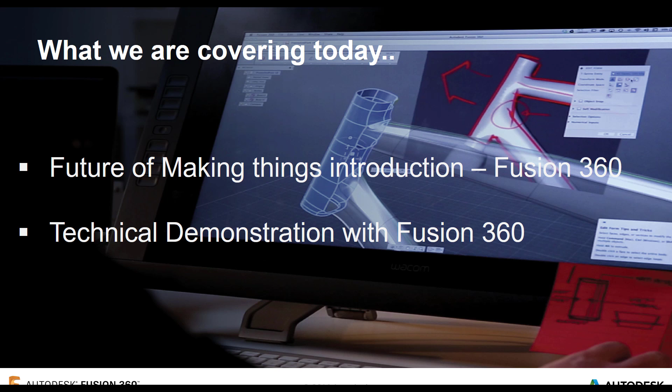So let's start off with an introduction to the Future of Making Things here at Autodesk. Generally speaking, to a lot of our customers, we see that they have quite a linear process. They start off with a concept design when generating a product - these could be just hand sketches, or very rough, rudimentary 3D models. They move into a design phase where they need to put some more production elements to the design, so more detailed design at that stage.

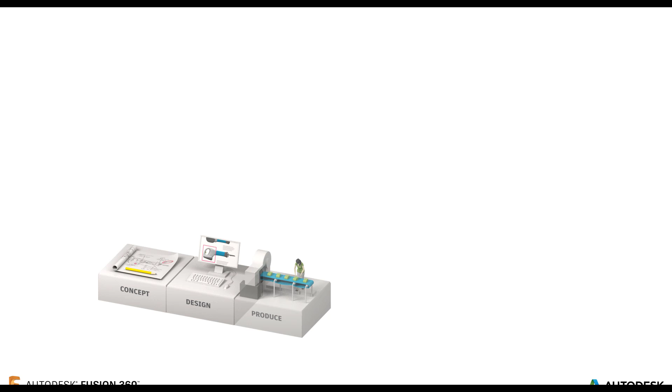Moving into the production phase, this is where they start to look at creating the products, whether additive or subtractive manufacture, or even assembly, into selling that product, and then finally into the operation and retire phase. Now, we term this a traditional product life cycle, and it's only got a fixed product value because around this stage, during the sales and operation and retire phase, we're having to rethink the concept for the new design of product or a different design of product.

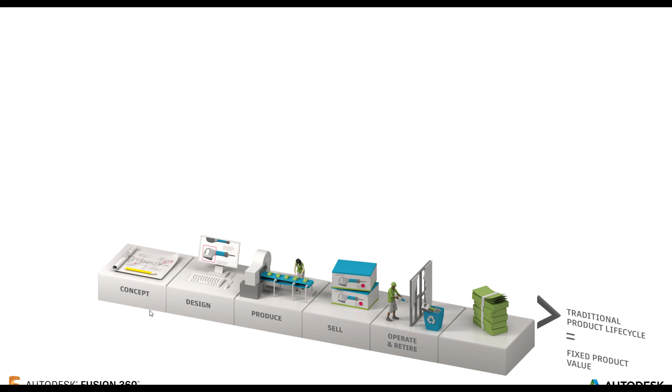Now here at Autodesk, we have something called the Future of Making Things. This looks slightly different. During the concept phase, we have a bit more of a personalized engagement with the customer or client. During the design phase, we can collaborate with virtual teams - these can be across different time zones or even across different sites.

We take into account additive as well as subtractive manufacture, having the ability to have more flexible manufacturing techniques. We can engage the customer a little bit more, giving them a more personalized customer experience because the product is slightly more customized to them. And we can also connect those products to IoT and Industry 4.0, giving us the ability to see how the product's being used in field and inform that design process a little bit sooner.

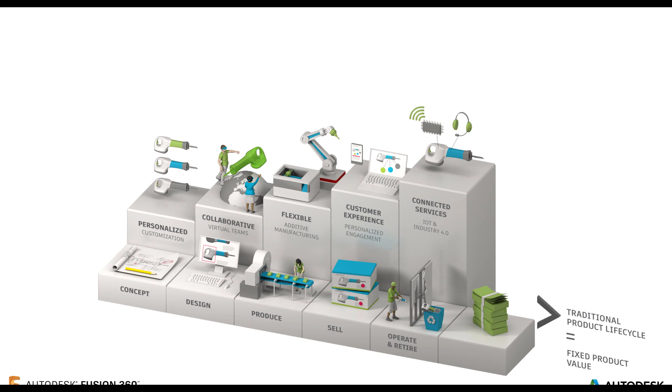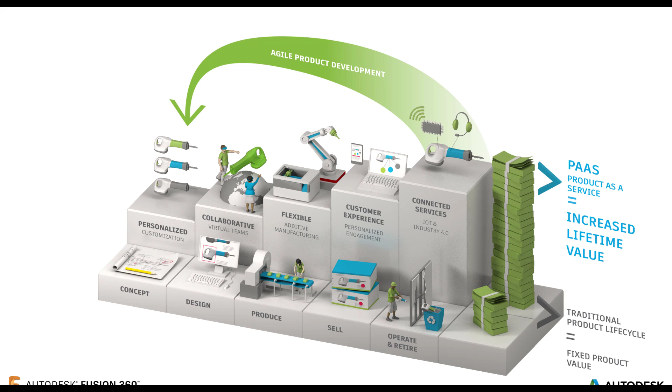Now, what this also gives us is the ability to have product as a service - we don't have to just sell the product anymore, we can also sell the services to that, and it gives us that increased lifetime value. It also allows us a smart or agile product development process, because while that product's out in field, we can then start informing the next generation of products a little bit sooner from the data we get from the field.

And this is what we term here at Autodesk the Future of Making Things. Now, to solve this, we actually have something called the Product Innovation Platform, and at the center of that sits Fusion. With that, we can start to look at the design aspect of the product itself - this could be anything from ergonomics all the way through to your standard production level design, through to testing that product, making sure it will actually work in the field, and then going ahead and producing all the relevant information to create the product.

We move into the make space. From here, we can go ahead within that one platform, start to either look at additive manufacture, 3D printing, or going down the route of adding toolpaths for CNC manufacture. And we can also move into the use phase, actually gathering that data while the product's being used to then inform our design and make phases in a little bit more detail.

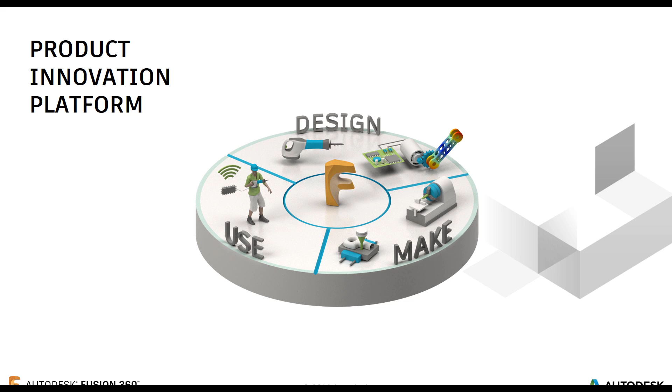And this gives us a complete solution. So we start off with design, move into make, and then while that product's out in the field, we can go ahead and gather that data and inform our design processes.

Now we're moving on a little bit with these as well. So we're adding new tools to the Product Innovation Platform, such as generative design, giving us the ability to look at the costs, material usage, strengths and weights of our design, and optimize that design to suit. We're also bridging that gap between additive and subtractive manufacture - maybe you want to metal additive print something and then do some final machining toolpaths on it, so bridging that gap and giving us a nicer look and feel and a flexible approach to manufacturing.

Moving into connected products, actually having the ability to have Industry 4.0 and a connected product, again giving us that rich data that we can get from field to then inform the next generation of product as we go.

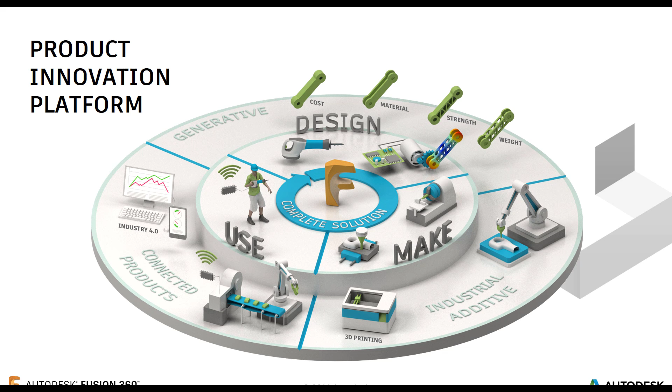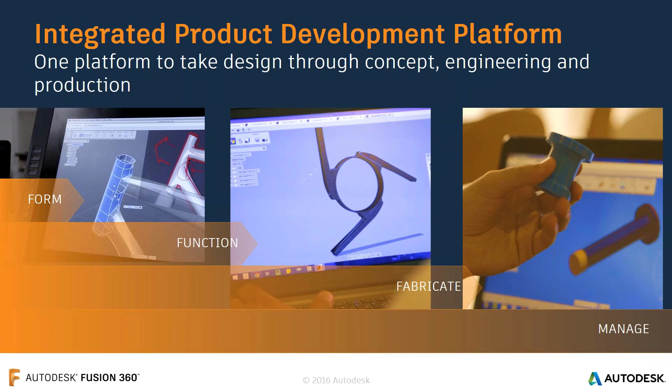What they also wanted was the ability to have access anywhere. One of the key things with Fusion is that it's not device dependent. You don't have to run a Windows machine. We can also run this on a Mac or an Apple. I've also got a Surface that I run this on. So we can quickly and easily have a wider range of hardware that we can run Fusion on, and also have the ability to connect teams.

In a traditional way, this would be done via email, or via Dropbox or FTP sites, whereas with Fusion we have a unique in-CAD capability. We can quickly and easily communicate directly within the CAD solution and connect teams all around the world. This is why we built Fusion 360. So that's a very quick intro into Fusion itself.

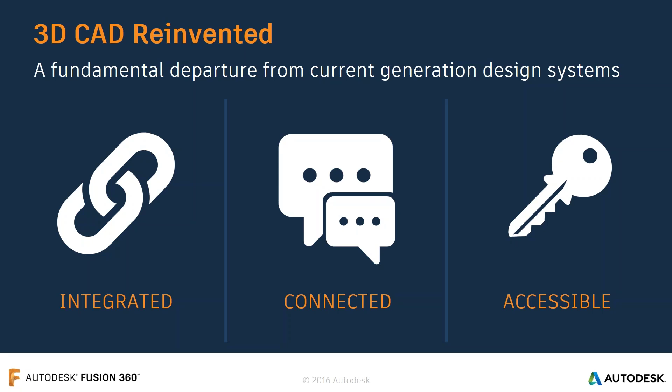Now we're going to move into a bit more of the technical side of things. We term here at Autodesk, 3D CAD Reinvented: a completely integrated solution, we can connect with teams, and it's also completely accessible. So we're going to move into the technical demonstration of Fusion.

With that, we're going to look at designing a sofa. We'll start off in a more concept phase, developing a real quick concept of the sofa to make sure we can get approval for it prior to moving further. Then we move into production design, creating a really rudimentary frame for it. We'll move that frame into testing to make sure that if 3 people are sitting on the sofa, it isn't going to collapse. Then into visualization, rendering the sofa and creating nice visuals for customers. Finally into the create phase, where we'll look at additive as well as subtractive manufacture - 3D printing as well as CNC machining.

So let's first take a look at the concept phase. Within the concept phase we need to generate some concept designs quite quickly. We may want to start off with just the armchair of the sofa and then develop that as we go through. We're going to use a technique called T-spline modeling, or freeform modeling, within Fusion itself. So let's jump into Fusion and take a look.

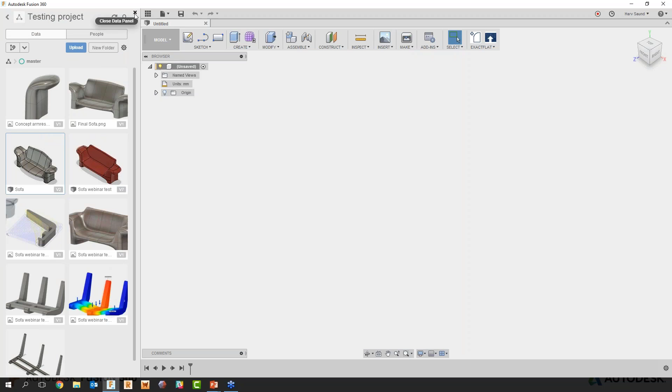So this is Fusion 360. It's a very clean, nice, fresh interface, so there are very few buttons you actually need to click. Over on the left hand side of the screen is my data panel, so directly from here I can have all the projects I'm working on at any one time, and from there I can harness each of the CAD files or image files. As you can see, I've got some PNGs and bits and pieces that we can house within the cloud.

Now we're going to go ahead, like I mentioned, and start completely from scratch. We'll start off by generating the armrest for the sofa we're going to create. We could do this in a few ways. For any of you on the webinar used to the traditional parametric way, we will be going into that, but what we're going to start off with is our freeform environment.

So to create a real quick concept, we're going to start off using something called T-splines. For any of you used to Play-Doh or plasticine, it's kind of the same way. We start with a primitive, like I've hovered over here with a box, and we just start to push and pull to create the shape that we need.

I'm going to go ahead and start off with the box itself. I'll move out a little bit so we can get some scope, and then from there we can specify an overall set of dimensions for the box we're going to be using. So I'm going to make this about 100 by maybe about 200.

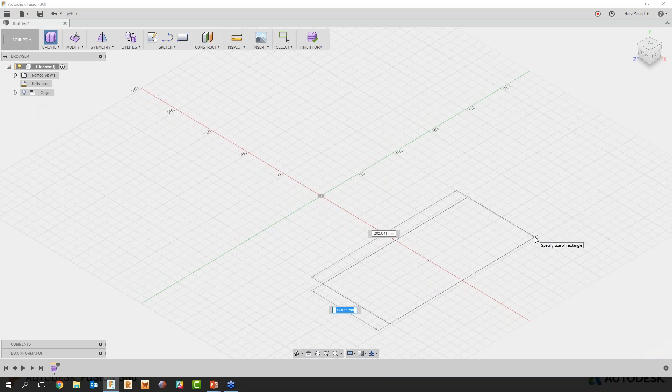I'm just going to literally gauge it with my mouse, but you can also type dimensional values in at this stage. So we'll go for something like that, and then we'll just drag this up a little bit so it's the right height and size that we need. We have complete options at this stage, so if I wanted to add in something like symmetry, bits and pieces like that, we can go ahead and add that into the design.

So what I'm going to do is start here, and then we're going to go ahead and start to generate the initial concept itself.

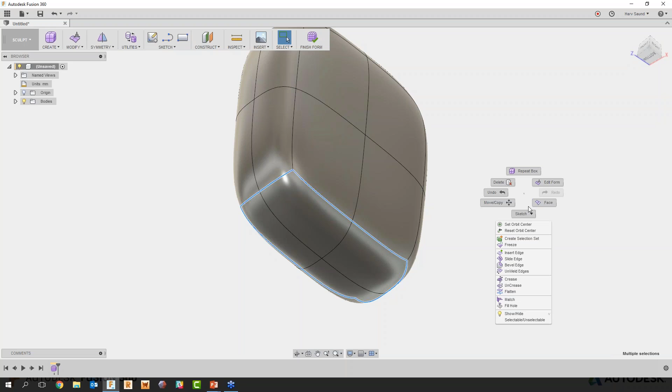Now obviously the sofa needs a flat base, so we're going to flatten off each of this bottom section. I'm just going to capture a few edges just here, and we're going to use what we term crease, and that's going to go ahead and create a flat edge for us at the bottom of the design.

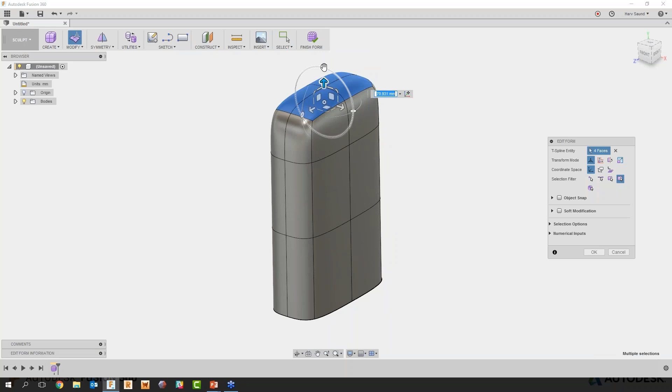Now we also want this armrest to have the ability to have our arm set on it. So what we'll do is pick up on these four surfaces or faces just here, and I'm just going to hold down Alt on my keyboard and drag, and this is going to generate us another section that, again, I'm just pushing and pulling to create the shape that I want from the armrest itself.

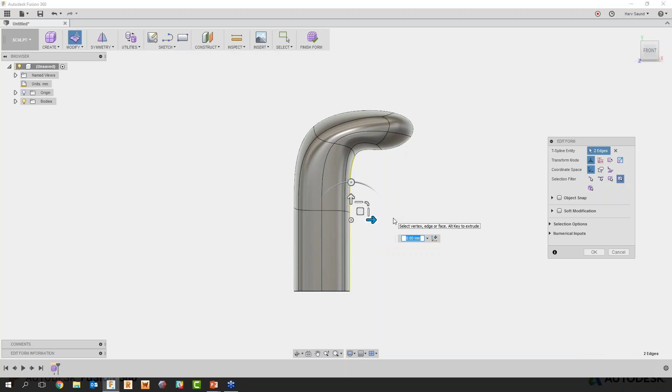Now we may want to go ahead and give this a bit more depth, so I'm just going to grab and drag that section in so we create a nice curve at the bottom. And again, what we may also want to do here is grab the two points just here and here and maybe spread those apart a little as well. So again, just using that real simple push-pull technique, we can grab and drag to create the kind of solution we need from our design itself.

Kind of looking like a cobra's head there, but a very crude version. I apologize to everyone on the webinar, you will have to put up with my bad jokes.

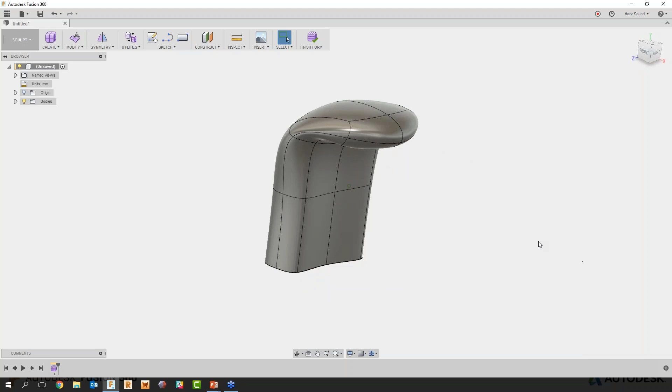So from here we get a nice kind of concept already going in a really fluid freeform shape that, again, with standard parametrics you'd potentially have to create a lot of sketches and a lot of curves to try and get that kind of shape itself.

I'm happy with that armrest, but what I want to do here is communicate this with someone. Down at the bottom left hand corner of Fusion is our comments tab. So if I just save this document, I'll call it sofa 123. There we go, we'll save that off, and then we'll activate our comments.

I'm just going to quickly create a version of this design, give this a little refresh, and this is going to generate our comments tab. So within the comments tab itself, we can start to comment to whoever we want, or collaborate with whoever we want.

Now this is unique to Fusion, you won't find this on any other CAD system on the market, and it's one of the key things for Fusion itself. From here I can quickly and easily write 'armrest done, what do you think?' If we post that, this creates a comment to this file that I've generated. This then uploads into an environment where I can quickly and easily collaborate with different users. Once it's posted, there we go.

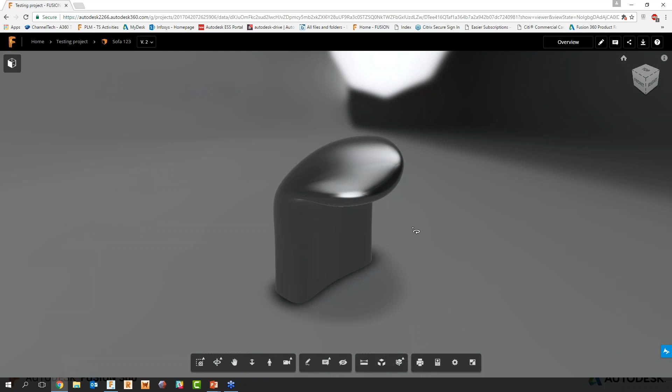Now, I mentioned it's web browser agnostic. What we've also got here is device agnostic, so you don't have to open this on a desktop machine, you can open it on a mobile device. We have a Fusion 360 app, so you can quickly and easily zoom, pan, rotate, start to create comments, and section and pan within the actual design itself.

So if I want to create a comment on the design, we can create this on a part or a point. If I just create a point here, we can reply to the comment that was initially created. We can say, 'looks good, can we create the rest of the sofa and see how it comes out?'

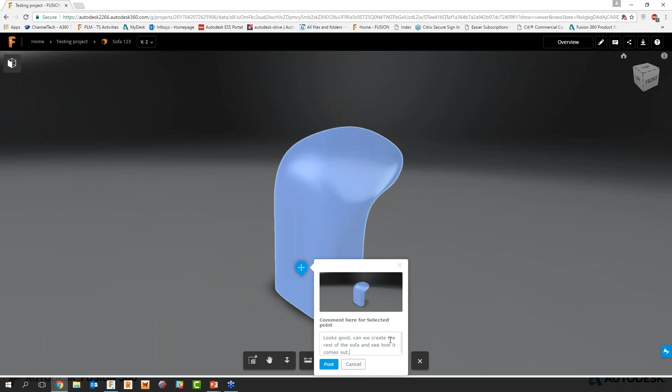If we post that, that's going to post that comment directly to our file itself, and put a little bubble within the web browser. But if we pop back to Fusion and open up our comments tab, that exists directly there - instant collaboration directly within Fusion itself. If I click on that comment, it will take me to the view it was created in, and we can click on the actual comment to open it up within its own window, so we can see in more detail how that person wants to collaborate.

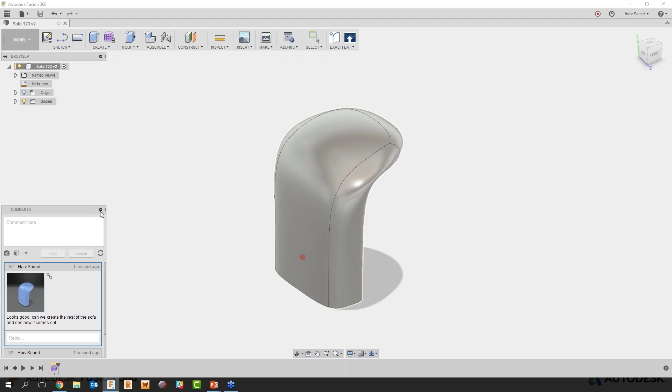So from here, we want to develop this a little further and create the rest of the sofa itself. We'll just edit this part. Now we want to create an area where people can sit, so we're going to quickly add in an extra edge here.

And you'll notice why when I go ahead and mirror the design. So we've added that edge. We want to mirror this to the other side because obviously we want two armrests. So what we'll do is just mirror the design to the other side.

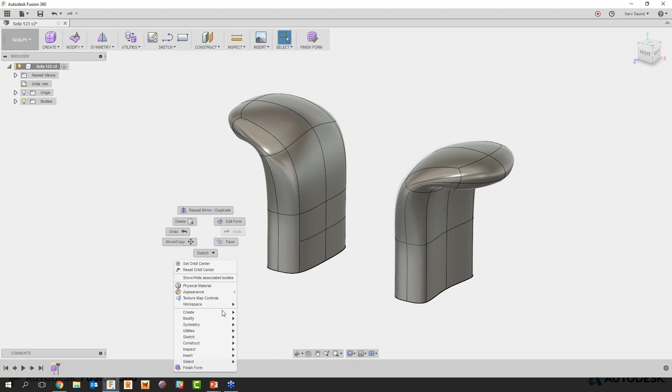We're not worried about the overall size at the moment. We're going to make a change there in a moment. What we want to do is join these up by the actual seat section, those areas that I've just sectioned off. So what we'll use is a tool called Bridge within Fusion.

This allows us to quickly and easily join those two sections of the design within Fusion itself, giving us the ability to quickly iterate on the design. Now, I don't know about you guys, but that is a very small sofa. What we actually want to do is have potentially three people sit on the sofa.

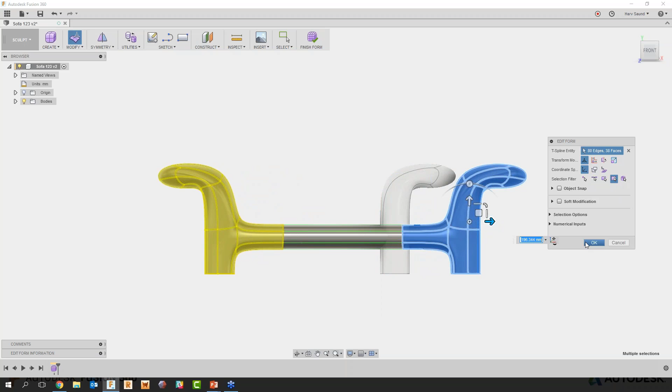So what I'm going to do is just quickly drag these out a little, using what we term edit form, grabbing the section we need and dragging. One of the key things I've got turned on here is symmetry. Once I did the bridge, we've got symmetry turned on, so if we do something on one side, it will repeat on the other. We'll grab and drag that out, giving us a bit more depth to the sofa itself.

Now, I don't know about you guys, but I'd like a sofa that had a back to it. So we're going to adjust this design to suit. The silhouette you see is just the original design—a really nice way of quickly and easily iterating through what we're creating.

So again, just like before, we're going to create some edges within our design, picking on some edges within the actual part itself—all of the edges that will create the back, these two sides and the bottom. Once those edges are created, we've got a section we can use to drag up and start making changes to.

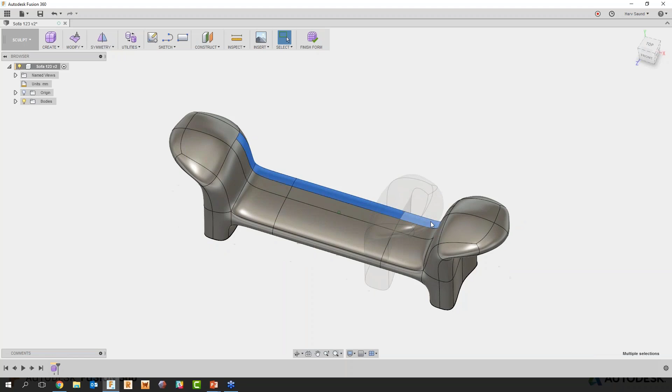At this stage I'm just going to turn symmetry off within our design so we can quickly and easily make these changes. I'm going to grab these areas just here, back into the edit form, and hold down Alt on my keyboard. We're going to drag these up and start to create that concept I mentioned earlier. And again, picking these sections just here.

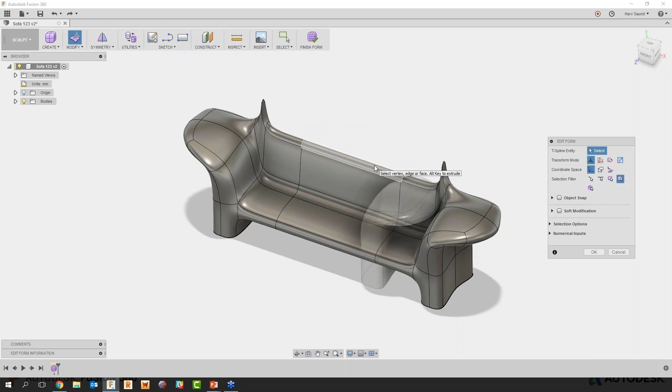Let's just do that with another control key. There we go. And then we'll drag those up to create the back of the sofa. And if we want the top of the sofa to be slightly smaller, we can just grab those and drag them down.

What we may also want to do here is just tilt it back a little bit, because that's very straight. So we'll grab those and create a quick tilt, moving that sofa section back a little, giving us a nice finish to the design.

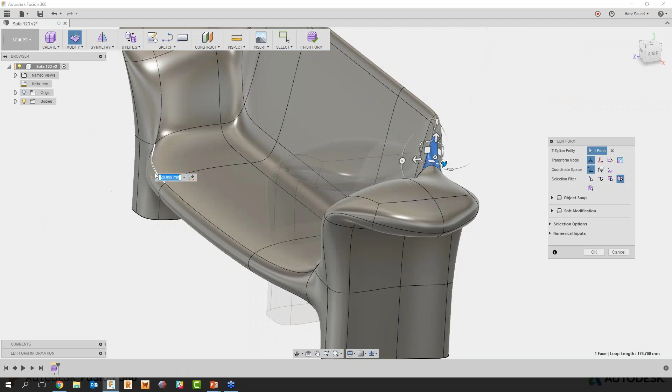And what we also may want to do is just drag this front section out. So if you wanted to make any changes just here, we can pick on any of these faces and start to drag those out as well if needed, giving us the ability to quickly and easily develop that concept exactly how we need it to be—no need to worry about sketches, making changes and bits and pieces like that.

Once that's done, our sofa's practically done, or the concept's done. It's a really nice finish, quite quickly designed within Fusion itself.

Back into the comments, we just want to go ahead and get some approval at this stage. If we wanted to, we could at this point put an appearance to the design, maybe go to a render and show someone this in a rendered environment. But what we're going to do is at this stage just publish it as it is, so we can say sofa concept done.

So again, we'll post that, and that's going to create another post that we can use. Now what we're doing here as we go is we're actually capturing versions, so you might see along the top we get a V3, V4, V5, capturing every version we create within Fusion.

So if you ever need to go back, you have the ability to do so. I'll give this a quick refresh and pop back to our main project to refresh from there. Each of the comments we've created are captured with the version itself, so you can find all these versions and see all the comments created per version.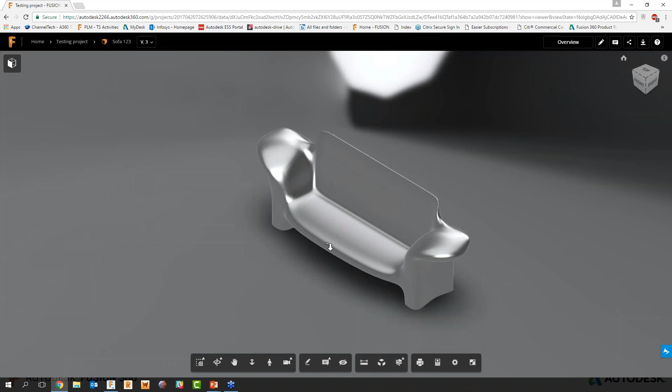And then if we hit the View tab, this puts us directly back into that view environment. As we can see, the sofa's updated and everything's working as it should.

Now we can again start to comment on points or objects. So if I wanted to comment on a point, we can create a comment saying 'looks great, can we push this into production?' That's a nice bit of approval there quite quickly within the design.

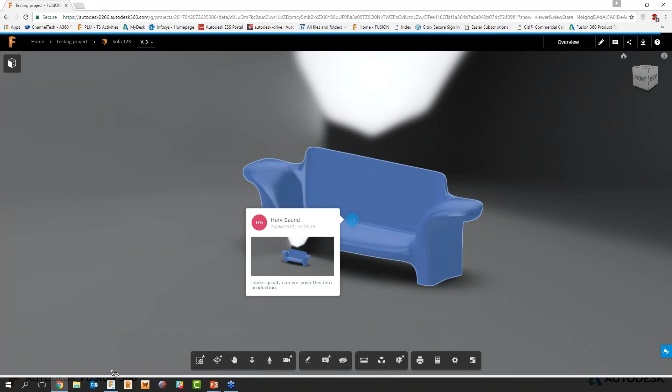So really quickly and easily, collaborating with customers and users within the company, we can create some quick and easy approvals directly within Fusion, all captured within the Fusion environment itself.

So let's pop back into the PowerPoint quickly. That's just a brief intro into the concept side of things. It's not a really detailed sofa, you'd go a bit further with it, but it gives you the idea of quickly using the form or freeform environment within Fusion, creating a quick concept, pushing that to the customer or people internally and asking 'is this good, is this not?' Then developing a quick and easy way of creating approvals directly within Fusion.

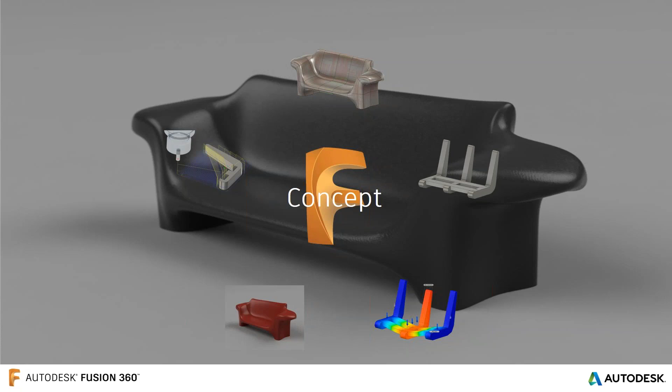Now like the customer mentioned, we want to move into a more production environment. So we may need to generate a framework directly within the sofa itself. We'll shell out the internals and create a sofa using standard techniques - lines, arcs, circles, dimensions - and then generate the information we need at this stage.

So we'll pop straight back into Fusion. As you can see, that comment was posted back into Fusion, we can see it just there. So we'll finish off this design using that production environment.

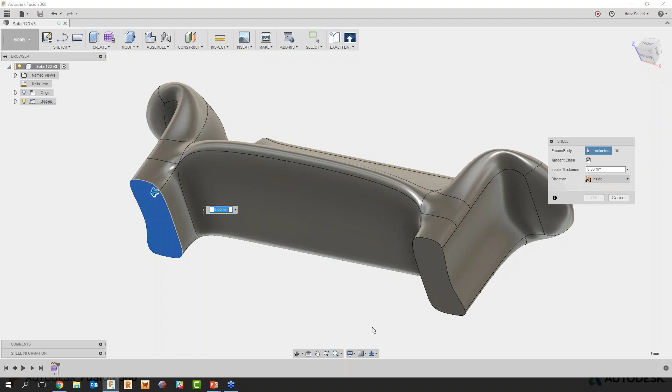The first thing I'll do is shell the part, using the shell tool. I'm using the S key to get to this sketch or model toolbox, and from here we can search for the tool we need. I type in shell, then specify the faces I want to remove and give this a wall thickness - I've set it at 2 mil. It gives a nice preview showing that wall thickness, and quite quickly we've created the shell within Fusion itself.

Now I want to see that shell all the way through, so let's quickly create a section for the design itself. There we go. Then we'll pick up a plane that we want to section through, just so we can see the design is completely shelled all the way through.

On that same plane, we'll create a sketch and try to create a really rudimentary kind of framework to sit within this, because we'd have the frame, some cushions on top of that, and then this outside shape which would be the textile. I'll go into how we develop this further from there.

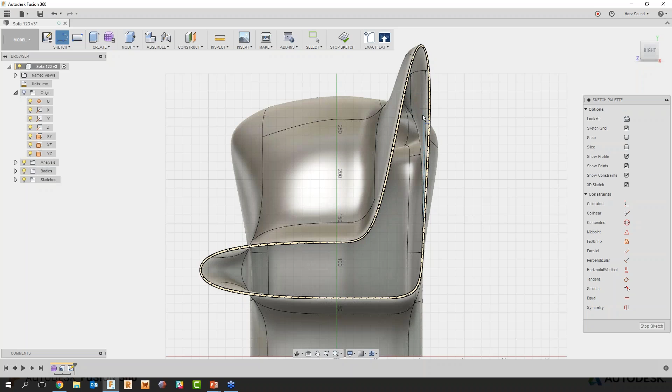So let's go ahead and start off with just our line tool. I've hit a keyboard shortcut of L to activate it, so you can quickly and easily start to develop the line. Now I want to create a framework without capturing any of these internal lines or edges, so I'm just going to hold down Control on my keyboard. With that, we'll quickly generate some lines within our design itself. These are going to be the real hard edges that we're going to need, and again we're just going to create a few of these in place so we can quickly start to generate the kind of framework we need for our sofa.

With that, what we'll also go ahead and do is put some arcs into this design. I'm just going to create some 3-point arcs for our design itself, again giving us the ability to quickly and easily use your standard tools that you would use within parametrics, giving us a final framework that we can then go ahead and use.

So that's the framework that we need, but we need to add in a few more constraints. Over on the right hand side of the screen, we can pick the constraint that we need and start to add tangency to some of these curves. This gives us the ability to finish off that design exactly as we need to, making sure all the constraints and bits and pieces are in place.

Now from that, I want to add some dimensions. I may want to make these two lines just here and here parallel, so we'll add a quick constraint in for those. Just hitting the D key on the keyboard, we can go ahead and create some dimensions as well. So you're not tied down to the method that I showed you earlier with just the freeform - you can again just use your standard methods of parametrics to quickly and easily create the kind of elements that you need for the design, giving you that mixed environment that you can go ahead and use.

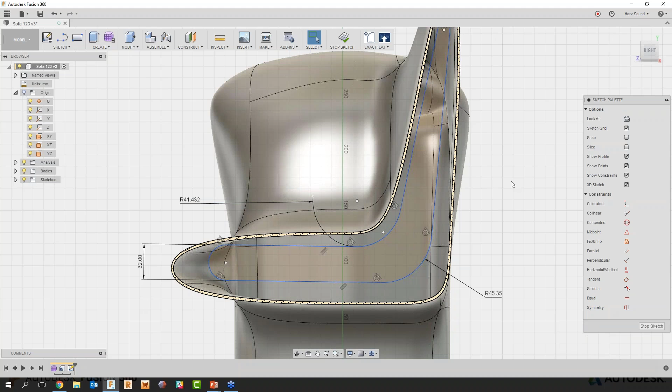Now I'm not going to dimension everything, it's just so that you guys can see this. Then what we'll do is pick up on those faces, or that sketch that I've created, and go into a tool called Press Pull. This is going to allow us to quickly and easily develop this shape - create an extrude. With that, we can specify that it's going to be symmetric, and then start to move that out to the size that we need it.

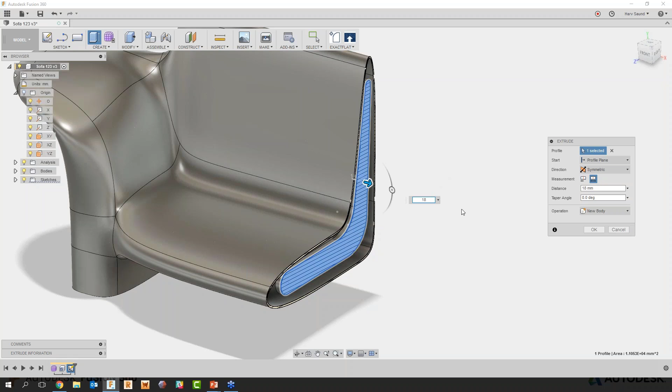Obviously we're in a section, so we're cutting off half of the design, but what I'll do is hide out the rest of the body and we'll create the rest of it. So we're just going to make this 18mm, so 9mm either side of that sketch. Click OK, and that's created that design for us.

Now what we may want to go ahead and do here, while we're still in the section, is - we're slightly short on the actual top of the design, and we don't want to fill that whole void with cushion. Same thing here, we don't want to fill that whole void with cushion either. So if we want to make a change here, instead of going into the sketch to do this, Fusion 360 is really flexible.

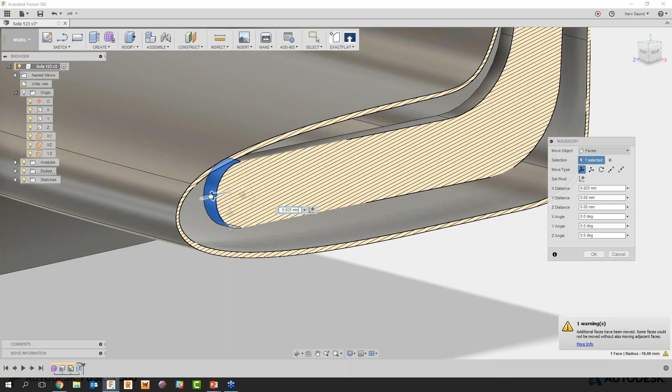It allows us to go ahead and do what we term a direct edit move. With that, we can quickly pick up on the face that we want to move, grab and drag, and start to move that face to the size that we need it to be. I can move that up, down, left, right, and we can generate the actual shape that we need without having to go into the part, look into the sketch for the component we've created, look for the dimension, maybe change the sketch, or remodel it completely. Fusion gets rid of that hassle.

So it gives us the ability to quickly and easily capture these and create the kind of move that we need for the part itself. Moving these back and forward, it will still maintain everything within the design, but gives us that real nice flexible approach to modeling. Again, we're not tied down to one route of modeling itself.

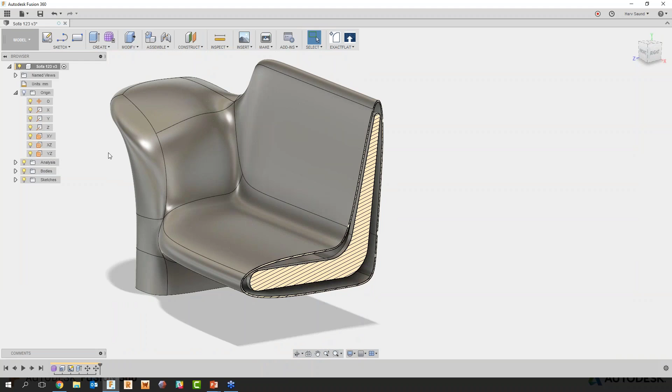So once that's done, we'll turn our section view off, and we're going to hide away the main sofa itself. What we may want to do here is create a framework, so one isn't going to be enough, we need a couple either side. So I'm going to bring back that sofa, or turn it into a more see-through, transparent sofa, and with that we'll pattern that framework within the design.

I'm just going to create a quick pattern, rectangular again. I'm going to pick up on the body we want to use, that one, and the direction we want to pattern, that way, and we can start to pattern. Now I want 2 of these, so we may want 3, but I only want 2 for this process just at the moment.

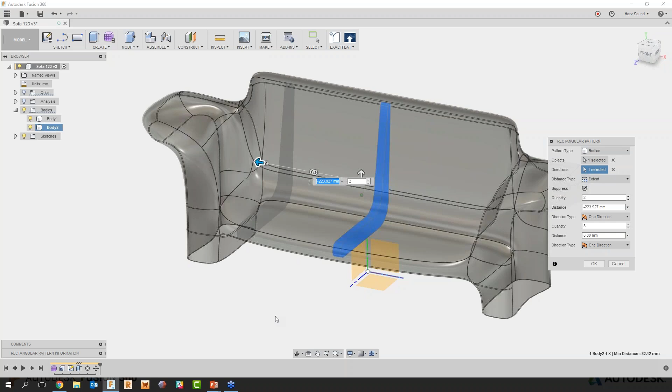We can start to specify the dimensional sizes, so I may want to go to about 250, so we'll go minus 250, right at the edge of that part. We'll also repeat that pattern, specify the same body, the same direction, go the other way, make that 2, and make that 250.

There we go. So once that's done, we can already see we've got an issue. These two parts here are actually sticking out further than the actual sofa itself, so we need to make a change.

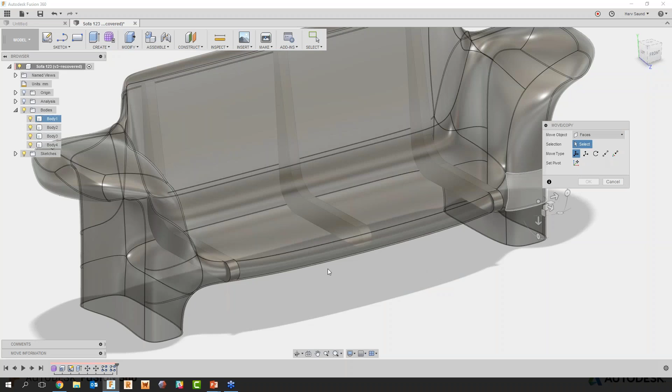I've already shown you it's quite quick and easy to make changes within Fusion. So we're going to use that same tool, move copy, like I mentioned before, and start to make some changes. I'm just going to pick up on some faces, that face there, and then we can start to specify pivots.

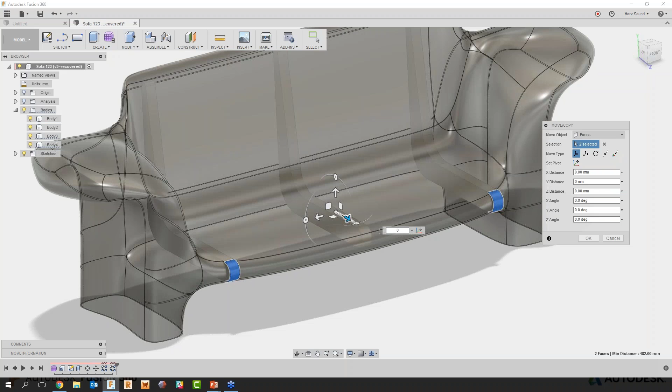I'm going to hide out this main sofa, and pick that point just there. We can bring this back in, and then just drag these back in. Let me just zero that off and select it. Dragging these back in gives us the ability to make those changes to those two patterns independently of the first one.

So this gives us the ability to really quickly and easily create a detailed, nice finish to the design and make sure you've got the right design first time round. Now that's done, we can hide out the sofa and create just a section where we need a bit of framework within the design itself.

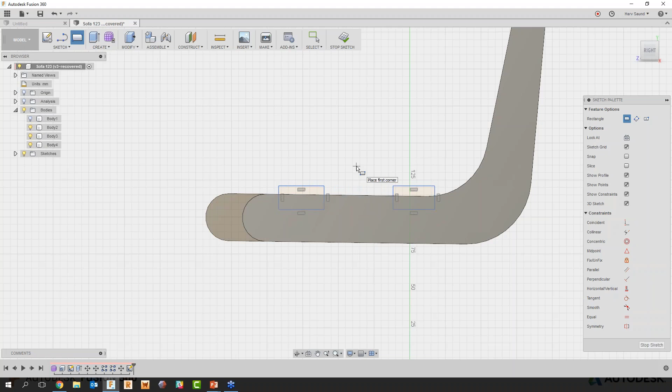I'm going to create a sketch on this front face, and I'll just freehand the sketch itself. I'm going to pick up on a rectangle, going from about here to here. I mentioned before you can put in dimensions if you needed to, but I'm not going to - I'll just quickly pick up on the areas I want to use.

So we'll pick up on these just here, and go straight into 3D. We'll go two sides, pick that one there, and just create the cut initially, and then go ahead and generate the part itself that was going to sit in there.

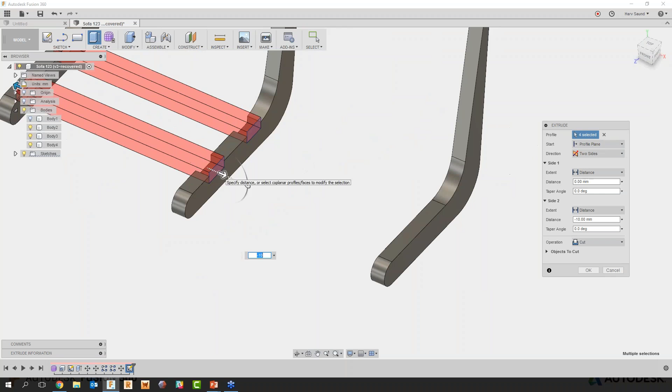One of the key things for Fusion is that it's flexible, so I can re-anchor the dimension to that side and say that's going to be minus 10 mil from that edge. And we can do the same thing on the other side - grab that dimension, re-anchor to that face, and say that's also going to be minus 10 mil. A real flexible key way of creating a set of designs.

And then what we're going to go ahead and do is just create the part that's going to sit within this. All I need to do, instead of creating sketches, is pick up on faces that we need to create the part for, drag that out, and it starts to generate that component itself.

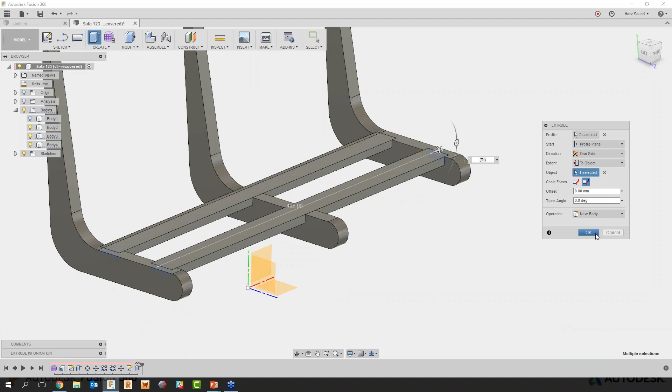Now what we're going to do is create this as a new body. Obviously they're going to be two different parts. And then what we'll also go ahead and do is just specify that they're going to go up to that face there, and both of those components are created. So really quickly and easy, we can generate the kind of components that we need directly for our design very fluidly within Fusion itself.

So popping back into the PowerPoint quickly, that sets off our production side of things.

So again, really quickly and easy, we can harness the standard techniques that we have with parametrics, so generating a line, putting a dimension to it, but we also have the freeform fluid way of doing that by just using move and using direct techniques to quickly and easily start to generate the design that we need.

Now what we may also want to go ahead and do is just test this design, make sure that it fits the correct kind of weight that we're going to go ahead and be putting to the sofa itself. So integrated directly within Fusion are some really high-end testing tools.

So let's just pop back to Fusion and let's go ahead and take a look. Now, I've been working in model or sculpt spaces at this moment in time. Now these are just the areas that we're actually working in so that we can generate models or we can generate sculpts, so freeforms. But if I click on that tab, we have extra workspaces that we can go into.

So like I mentioned right at the start, we've got an integrated platform. So instead of you adding something in, we can actually go ahead and just flick to a different workspace and it will then go ahead and take us directly to that workspace. In this scenario, it's simulation.

So we have some really detailed high-end simulation tools that you guys can use on a day-to-day basis, whether this is during your production design or design validation, or moving a bit further on. So we have static stresses, frequencies, thermals. We can also go ahead and start looking at the first level of generative design, which is something called Shape Optimization, which looks at topology optimization, so the shape of the product itself.

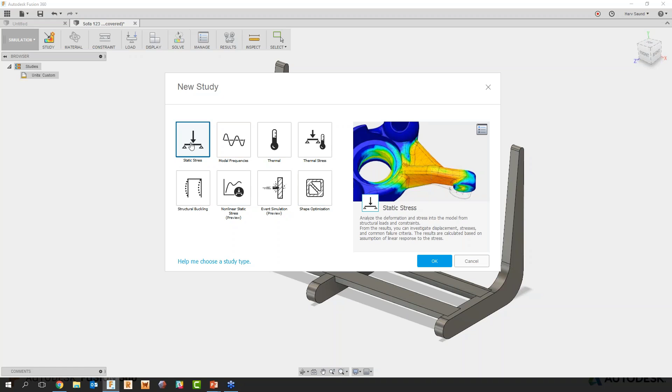For this example, we're just going to go ahead and look at static stress. If I click OK to that, what we can then go ahead and do is just work left to right and start to generate the simulation itself.

Now, I just want to turn off the main sofa because we're not going to go ahead and test that main part. So just in our model components, I'll just uncheck that quick box.

What we'll then do is just specify our materials. Now we're not going to make this out of steel. Just for this example, we would be making this probably out of wood, but we're going to go ahead and use an aluminium. So we'll just use a 2014 T4, and that's going to go ahead and set the structure itself. We're then going to go ahead and put a constraint to the part.

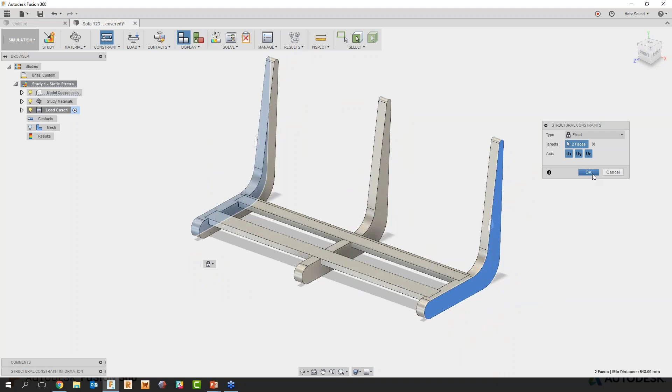So I'm going to just go ahead and specify the constraint on each side of this part itself, and we're just going to analyze the center section itself. So this is kind of like, where would this part be fixed in a real life scenario? So you may have a bit more framework just there to fix that component in.

And then what we'll do is we'll just specify a load. Now these loads can be specified on individual faces, or we can actually limit the target of the load itself. Now for this design, I'm actually going to go ahead and just specify 10,000 newtons, so we're working at approximately about a ton. Now we can go ahead and start specifying pressures, moments, remote forces, bearing loads, but I'm going to click OK to that, and that's then going to go ahead and set our force for us.

Once the force is set, all we've got to do is specify contacts. Now these are generated because we've got an assembly here, and it's just the interaction with each of the parts itself. And once that's done, prior to us running the simulation, we have a couple of checks we can do. Firstly, at degrees of freedom, make sure everything is actually fixed as it should do. And secondly, just a quick pre-check to make sure that we've got all the information ready before we actually solve. Once we hit the Solve tool or the Solve tab, we have the ability to harness the cloud.

Fusion 360 is what we term hybrid cloud. So you have portions of Fusion 360 that work on the cloud, portions that don't. The main software is a local install. The data itself is stored on the cloud, but we can also harness the cloud for solving and capabilities where it would take a while to use the hardware we've got at our disposal.

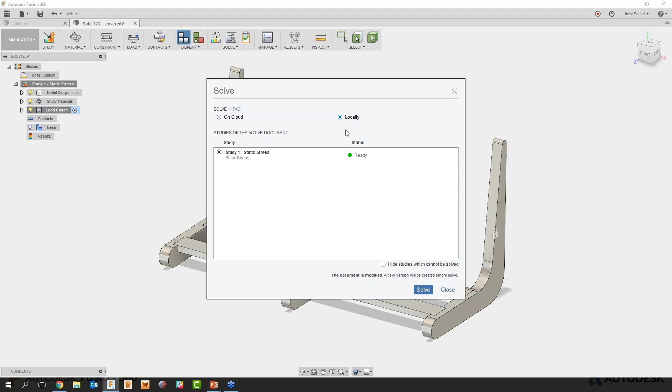If it's a number-crunching calculation like a simulation, we can push this directly to the cloud, especially if we don't have the hardware. Or if we do have the hardware on our machine, we have the option to solve locally. So if I hit local solve, I'll just solve this locally. I have the hardware on my machine, and this will just run through a very quick local solve.

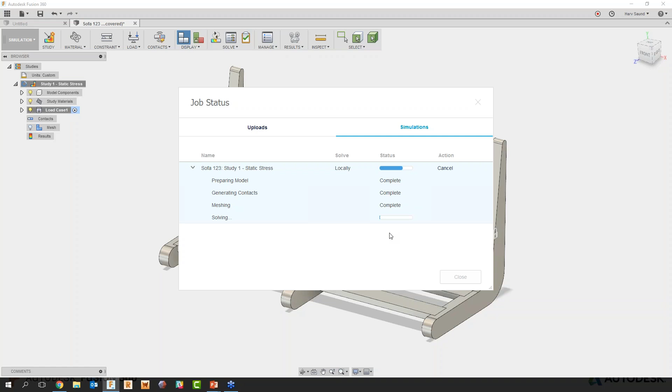Like I mentioned at the start, it's quite high-end simulation directly within Fusion. It's NASTRAN, so you might know that name. From here, we can start to see safety factors within the design, look at stresses as to where those stresses are occurring, and we're barely stressing that design with that 1 ton load, probably because we're using 18 mil aluminium over the whole thing.

We can also look at displacements, and any of these results can be animated. So from here, we can quickly and easily animate each of the results, giving us a really nice detailed way of showing these results to someone.

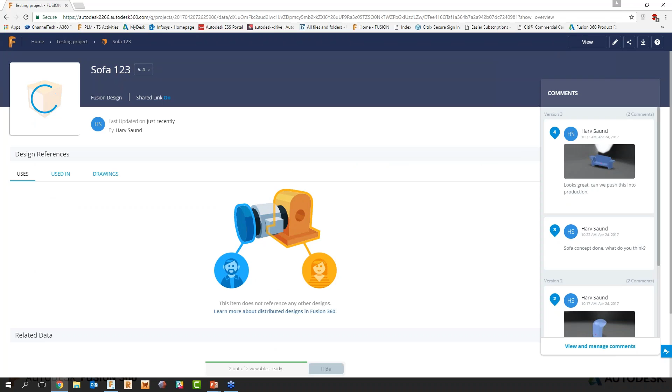One of the really key things for us is communication. So if I pop back into that web browser, we'll go back into our testing project just to give this a refresh. What we can then do is start to view this design. Again, those simulations I just ran are captured within our design environment itself.

So from here, we can load that simulation directly in the web browser. We're not having to produce a report as a Word document or PDF and email that to a customer. Instead, we can quickly look at stresses within the design directly within the web view, with no need to produce any of that overall data ourselves.

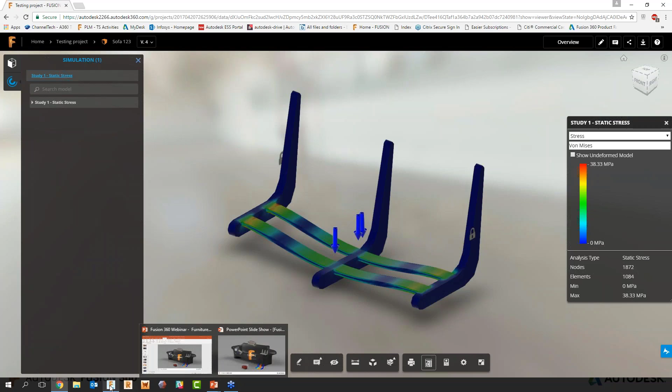We can also export any of this data. So if you wanted to, you can export any of the results as PDFs, PNGs, JPEGs, but we can also create a report either as HTML, Word, or PDF.

Once that's done and we're happy with the testing result we're getting, let's move into the visualization side of things. We want to create some really nice visuals, since we're creating something that someone's going to buy potentially based on a visual, so we need some really nice tools to do this.

Fusion has the ability to create really detailed renders directly from the products we generate. So we're going to pop back into Fusion itself, and it's just a quick switch on the workspace and we're over into a rendering environment. We may want to turn on the main body, because that's what people are going to see, and from here we can start to specify the views and bits and pieces that we need.

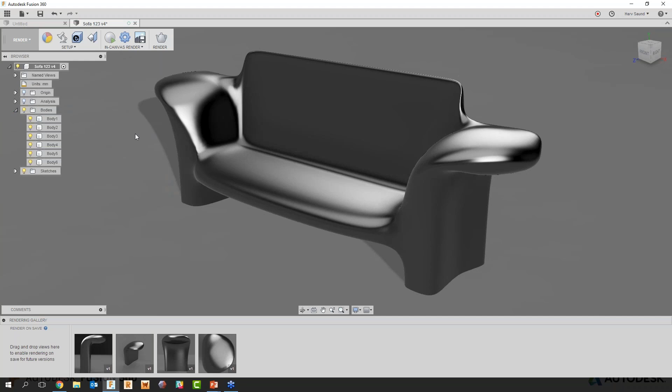The view you see on screen here is your camera view, so I can specify what kind of view I want to work with. We can then start to specify any appearances. We have a whole host of appearances directly within Fusion, but we can also start downloading extra appearances directly into Fusion as well.

Now, I have a customer who generates sofas, and what they do is get their customers to send them over a swatch of appearance.

So what they'll do, the customer will take a photo of the swatch of the appearance and upload it into the web browser. My customer then downloads that, puts it into Fusion itself, renders the design, and sends it back within an hour. So it gives that customer a product as a service, a nice detailed way of communicating with the customers.

Now, all I need to do with these appearances is drag and drop. We can at this stage start to edit those if you wanted to edit any colors or changes.

And with that, we can start to specify any scenes. We have a whole host of different scenes you can use, and again they're just drag and drop, just like the appearances. You can start to specify information for those as well, so if I wanted to turn reflections on for the bottom and the background, I can.

Then you can start to specify perspectives, exposures, and also depth of field. So if I want my depth of field to be there, I can - I'll put, let's say, a 0.25 blur on it.

This gives us the ability to run a very quick in-canvas render, so this is going to turn my screen into a render itself. It gives us the ability to quickly and easily generate some really high quality visuals for customers, for them to see exactly what you're going to be creating for them.

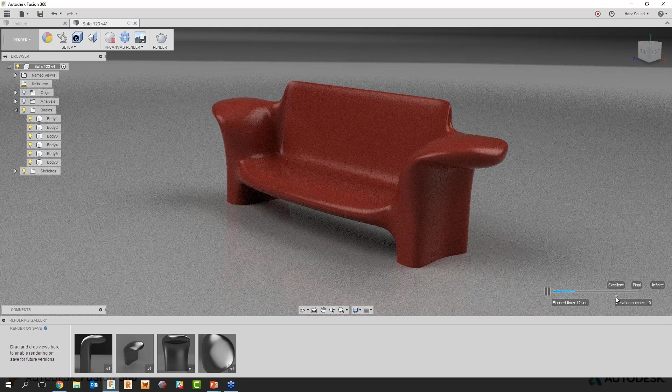And we're using a technology called ray tracing to do this. Ray tracing passes over the image and refines it to a threshold that you set. I've got my threshold set at excellent, and it will iterate through the design and start to generate the kind of render that you need.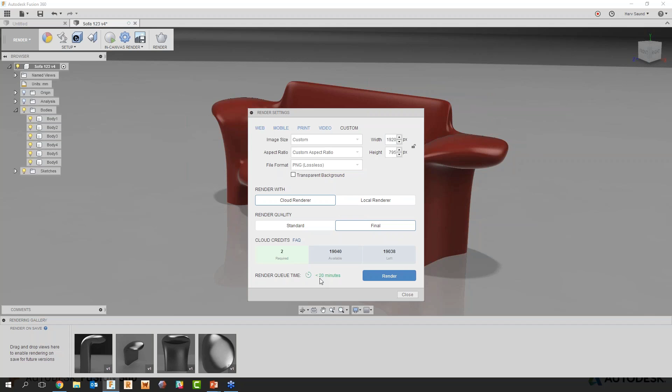Once you're happy with it, you just hit the render button, and from here, just like the simulation, you have the ability to run cloud or local. If you don't have the hardware on your machine, you can run a cloud render, or if you do have the hardware, you can run local renders. It also gives you a quick render queue time.

So really quickly and easily, you can start to create some quite stunning visuals directly from Fusion - a really nice way of creating detailed information that you can pass on to customers and show them exactly what you're going to give them.

And then finally into the create phase. Now, great, we've generated all this 3D data - what we actually want to do is produce the product in real life. So again, popping back to that integrated platform for Fusion, we have the ability to run 3D printing operations as well as CNC operations directly within Fusion itself. So let's jump into Fusion and take a look at these.

Popping back into Fusion, let's say we want to return the opacity back to 100%. Let's say we want to give the customer maybe a 3D representation of the sofa itself - what we can do is just generate a quick 3D print for them.

So we have our Make tab along the top. If you wanted to do this via Bureau Services, you can - we've got some links to them there. But you can also just use 3D print directly within Fusion.

From here, we can select the body that we want to use. We have the ability to specify refinement, so we can save an STL out, or we can send this to a 3D print utility. So if you've got a 3D printer, you might have a bit of software for that - you can push that to that software. We also have software at Autodesk that does that.

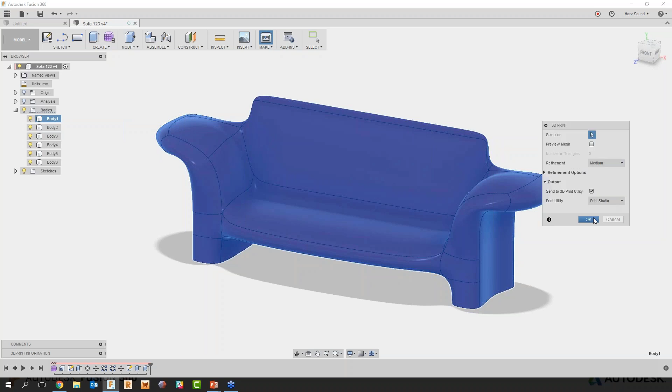Something like Meshmixer or Print Studio, and that's what I'm going to pop this into. So once Print Studio is fired up, there we go, we can start to see that our sofa is actually a lot bigger than the print volume that I'm going to work in.

Now we don't need to print to that size, so what we need to do is just give them a nice look and feel representation. So we can specify our printer along the top, which gives us the ability to choose the one that we want to use.

We can center the main part in the design itself, but we can also go ahead at this stage and do just a quick scale to fit. It gives us the ability to quickly and easily move, pan, zoom, rotate, and change the size of this part. If we wanted to move this in a specific direction, we can do it within the design itself, within the print volume.

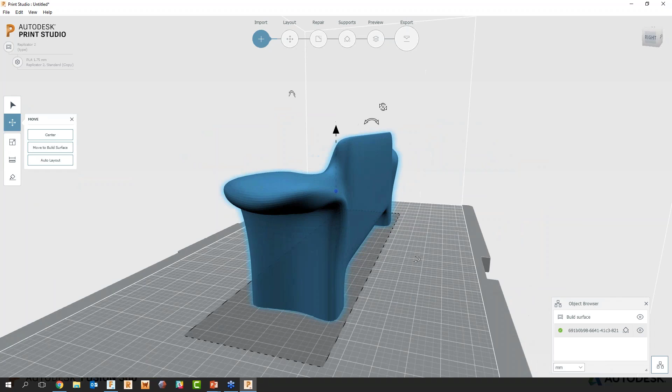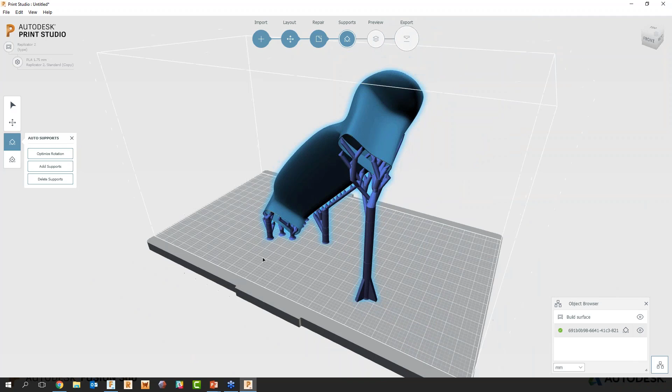Once we're happy with it, popping over to our supports, we can go ahead and optimize the rotation for the design and add supports to our product. This thinks that printing it that way is the best way to do it. Once our supports are added to the design, we can prepare this for print, getting a nice look and feel of how that part's going to print directly within its volume.

If we hit the preview tab, this is going to start generating the slices for the 3D print. These are generally termed as toolpaths. Once that's processed, it will give us a preview within a slider, and it also shows us how long it's going to take to print.

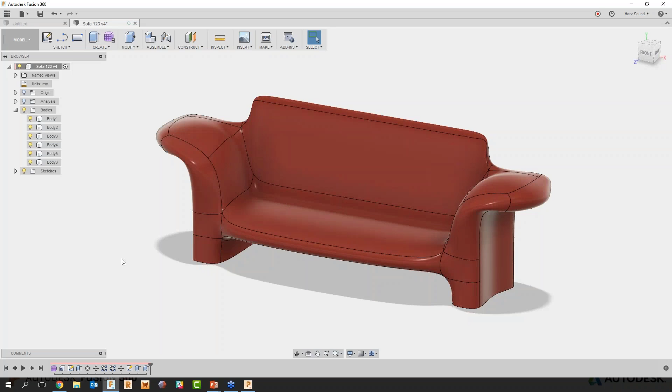From here I can just drag this slider and it will start to show us how that part's going to print. Again, a really nice look and feel for the customer, so they can see how that part's going to be printed and how it's going to work. At that stage you can export to the printer file, the native printer file, and just send this directly to print.

Now what about if we want to look at this part and maybe CNC manufacture it? We have our CAM module directly within Fusion itself. Just a quick workspace switch into CAM, and from here we have our standard CAM operations. For Fusion, we can do anything from 2.5 up to 5 axis simultaneous directly within Fusion, giving you the ability to take your design from art to part.

The first thing we need to do is generate a setup for the design. This is just going to be the stock that we're going to be using. From here we can start to specify your model orientation, so if I want my Z to be up, we make sure that it's up. Then we can specify the corner that our origin is going to be at.

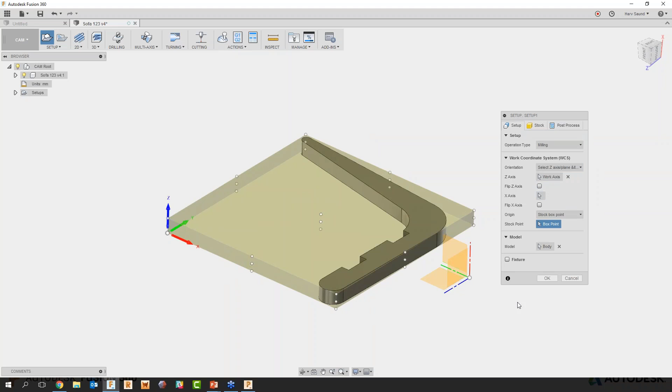Once the stock's set, just like the simulation, the render, and the modeling, we start from left to right. We can then go ahead and do some manual toolpaths, specifying manual roughing strategies, facing or contouring, or we can have Fusion's CAM go ahead and do that for us, using an adaptive clearing strategy.

We specify the tool that we're going to use out of our tool library. The tool library itself can actually be customized — I'm using two monitors here, that's why there's a slight delay — but you can customize that tool library to suit the tools that you guys have. For this design, I'm going to use a 5/16 flat end mill.

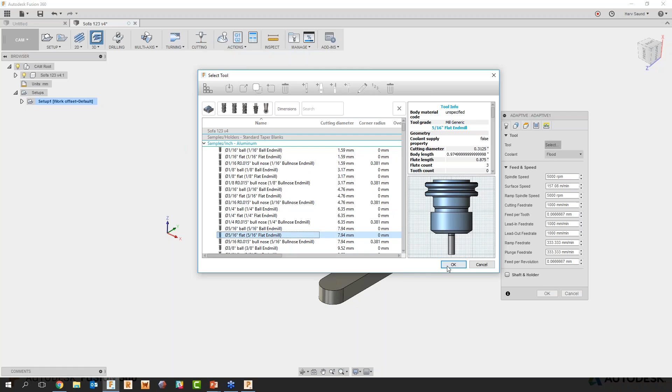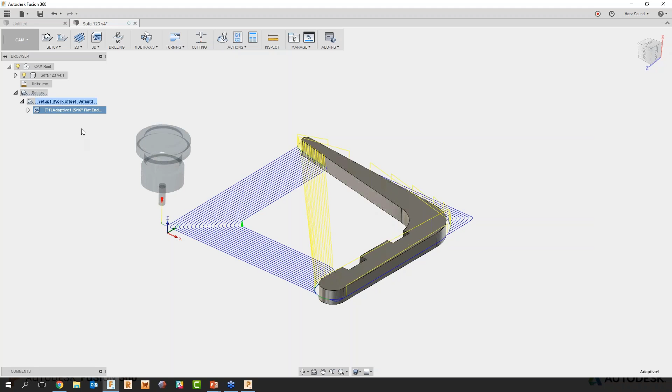We'll click OK, and all the feeds and speeds are set with the tool. We can specify what we're going to machine, any of the heights, any stock that we want to leave on the design, any ramping conditions and bits and pieces. If I just click OK to that, it's then going to run away and create all of the toolpaths required to create that component.

From that, it gives us the ability to quickly and easily start to simulate. It's just going to finish off creating the toolpaths. There we go — and if we simulate, I'll just turn the stock on, and quite quickly we can start to see how the part's actually going to be cut out of a bit of stock that big. This could be useful if you're using wood or even cutting out steel for framework, giving you the ability to quickly and easily see how that part's going to be finished and cut.

If we're going to be cutting this out of wood, we may want to use something like a water jet. We have the ability to use water jet, plasma, or even laser cutting methods directly within Fusion. We just specify the tool we want to use, which sets the kerf width of the actual cutter. I'm going to use just a 1 mm because we're cutting this out with a water jet.

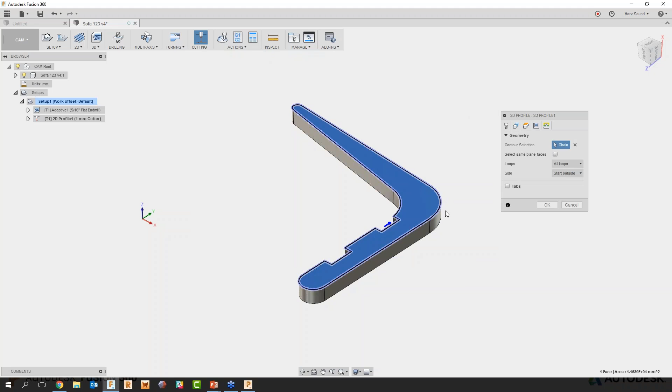Again, we can specify the contour that we want to cut. I'm just going to pick the upper face because we're looking to cut that edge out of that bit of stock. Then we can specify height, passes, any compensation types, any stock to leave, and any lead-in and lead-out information that you need.

Once that's done, it's going to generate us a 2D contoured path. This is a water jet toolpath. If I just simulate this path, pop to a right view and play it through, this is going to generate us the exact contour we need for water jet cutting the part itself. So again, this gives us the ability to harness not just your standard machining tools, but also water jet, laser, and plasma.

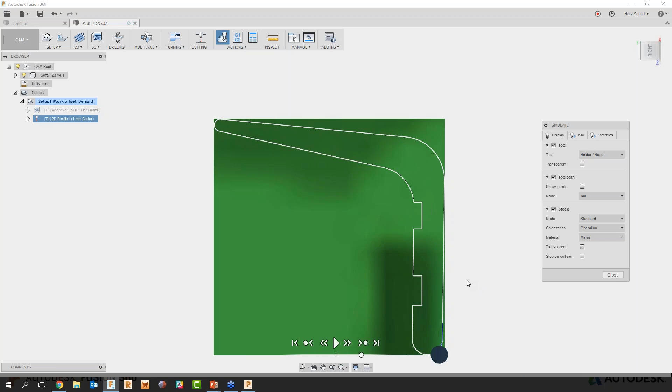So a real quick intro into the create phase, giving us the ability to have that one integrated platform all the way through to generate the sofa that we've got just here.

We started off with a bit of freeform modeling, so real quick concept generation to create the general base shape of the sofa. We then moved into production, looking at parametrics, and also a little bit of direct modeling where we could just push and pull, giving us the flexibility of using different modeling techniques. Then we moved into the testing phase, making sure that someone can sit on the sofa without it breaking, into the actual visualization, creating a really nice finished render, which this is from Fusion 360 on screen, and finally into the create phase to generate that part as an actual component. So taking that design from art directly through to part.

Now, one of the other key things with Fusion is its roadmap. What you might notice is we're completely transparent with Fusion 360 itself. So you guys can go online to that website at the bottom and actually view the roadmap for the software. It gives you the ability to see what we're working on at any one time within the design, or within Fusion itself. So it shows you the future of Fusion.

You can also add your own ideas to this. Under Idea Station, under the same blog post, you can go ahead and start to add ideas for what you want in Fusion as well. And we do listen to them. So again, I definitely implore you guys to go ahead and have a look.

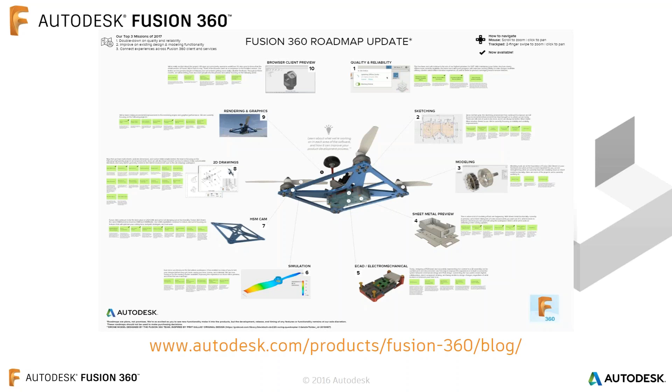Go to autodesk.com/products/fusion-360 and the blog, and you can start to see all our roadmaps and what we're working on at any one time. So if you want to find out more about Fusion itself, you can either visit the previous website or this one, autodesk.com/Fusion. From here, you'll get the ability to look at our customer examples, see all of the roadmap information, the blogs, the forum posts, and bits and pieces, and see how Fusion's developed over the past few years as well. So again, I implore you guys to go ahead and take a look.

And that was Fusion 360 for furniture design, using a sofa as an example.